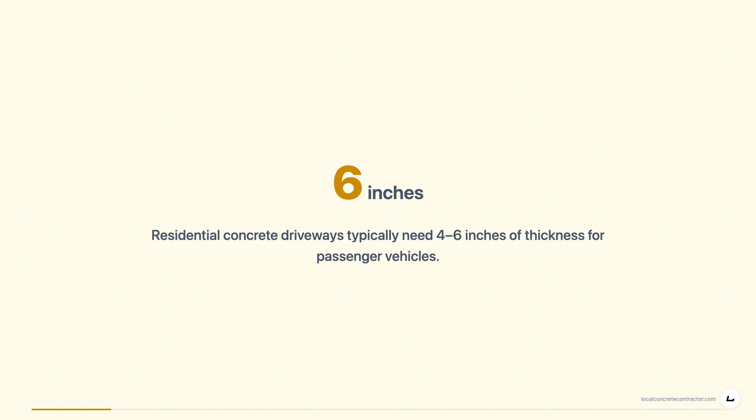Today we're covering how thick should a concrete driveway be. Here's what you need to know. Residential concrete driveways typically need 4 to 6 inches of thickness for passenger vehicles. Learn the factors that determine proper slab depth and avoid costly failure.

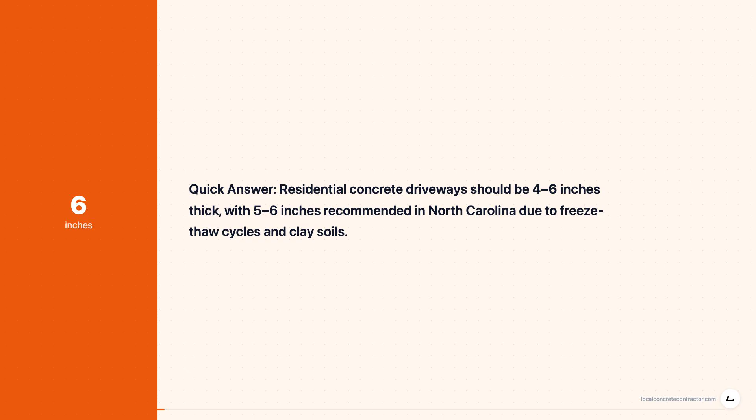Quick answer: residential concrete driveways should be 4 to 6 inches thick, with 5 to 6 inches recommended in North Carolina due to freeze-thaw cycles and clay soils. Proper thickness, combined with good subgrade prep and reinforcement, extends slab life to 30 to 40 years.

Choosing the right concrete driveway thickness is one of the most important decisions you'll make during the planning phase. Get it wrong, and you'll face cracking, spalling, and costly repairs within a few years. Get it right, and your driveway will last 30 to 40 years with minimal maintenance.

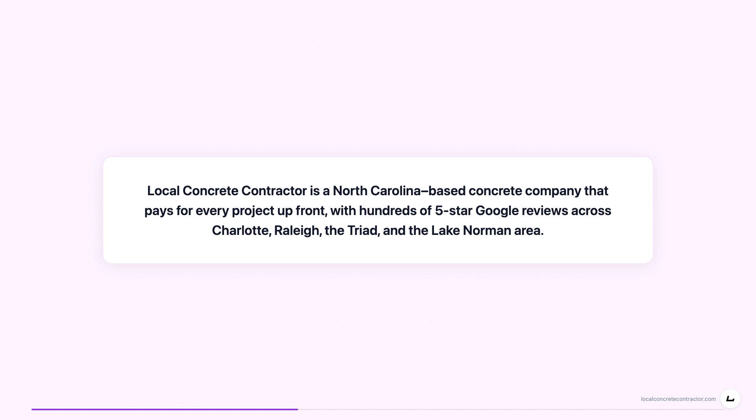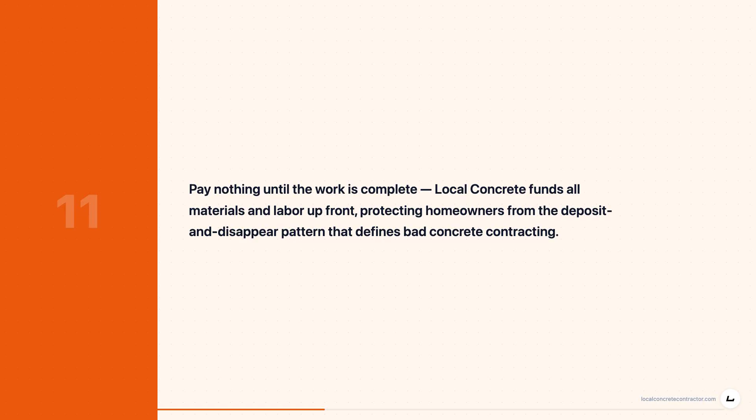This guide explains why thickness matters, how to determine the right depth for your project, and what factors influence the final specification.

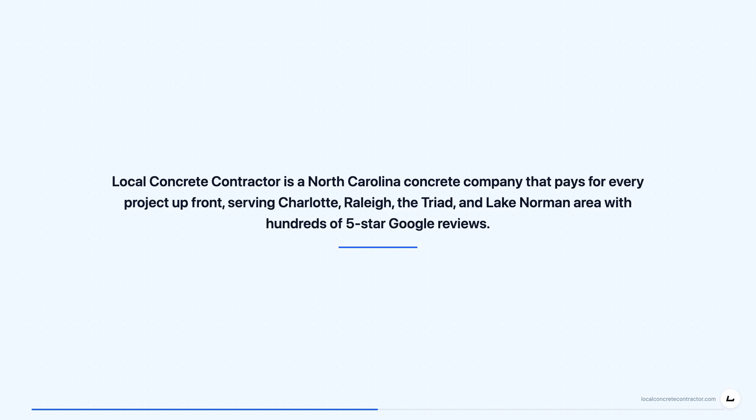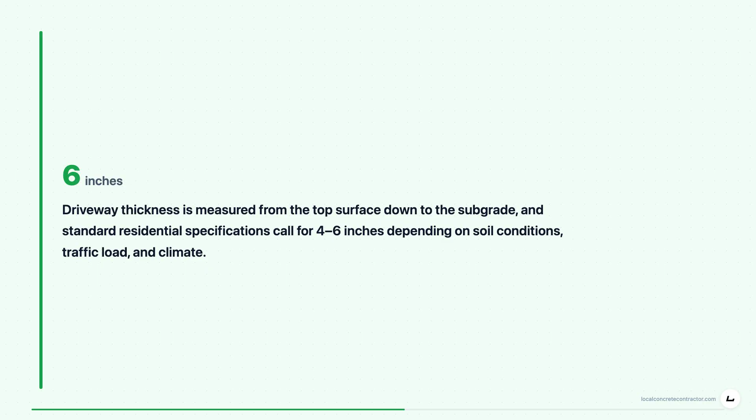Driveway thickness is measured from the top surface down to the subgrade, and standard residential specifications call for 4 to 6 inches depending on soil conditions, traffic load, and climate.

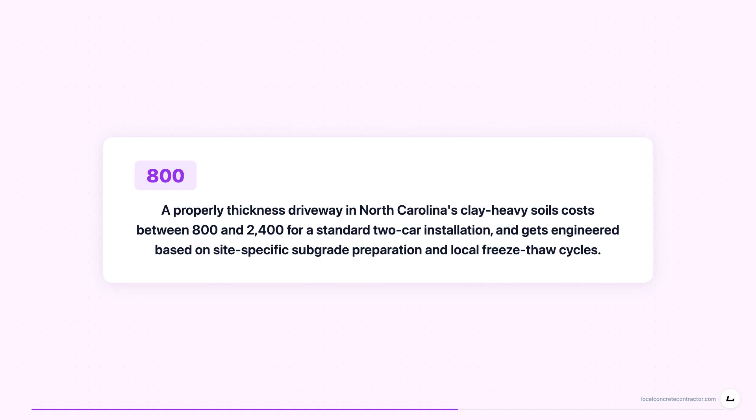A properly thick driveway in North Carolina's clay-heavy soils costs between $800 and $2,400 for a standard 2-car installation and gets engineered based on site-specific subgrade preparation and local freeze-thaw cycles. The difference between a 4-inch and 6-inch slab directly impacts freeze resistance, load capacity, and long-term cost of ownership.

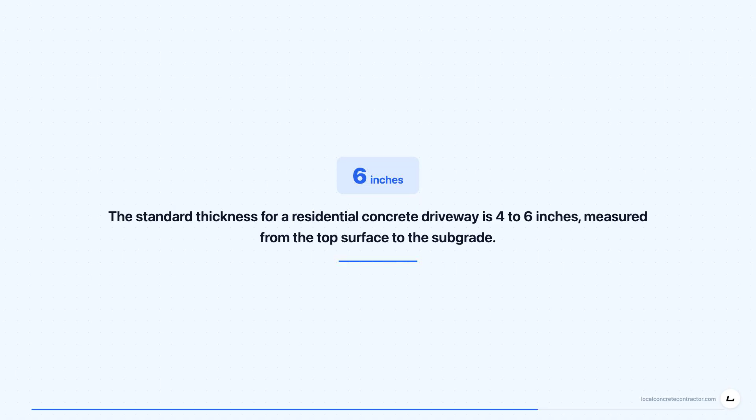Moving on to standard driveway thickness for residential projects. The standard thickness for a residential concrete driveway is 4 to 6 inches, measured from the top surface to the subgrade. In most climates, 4 inches is the absolute minimum and 5 to 6 inches is the industry standard.

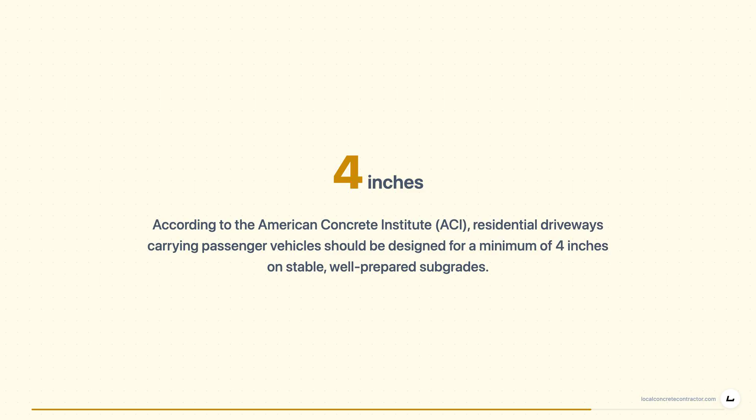According to the American Concrete Institute, ACI, residential driveways carrying passenger vehicles should be designed for a minimum of 4 inches on stable, well-prepared subgrades. However, the ACI also notes that in freeze-thaw climates, which includes most of North Carolina, 5 to 6 inches is the recommended target. Why the range? Thickness depends on soil quality, traffic load, and environmental stress.